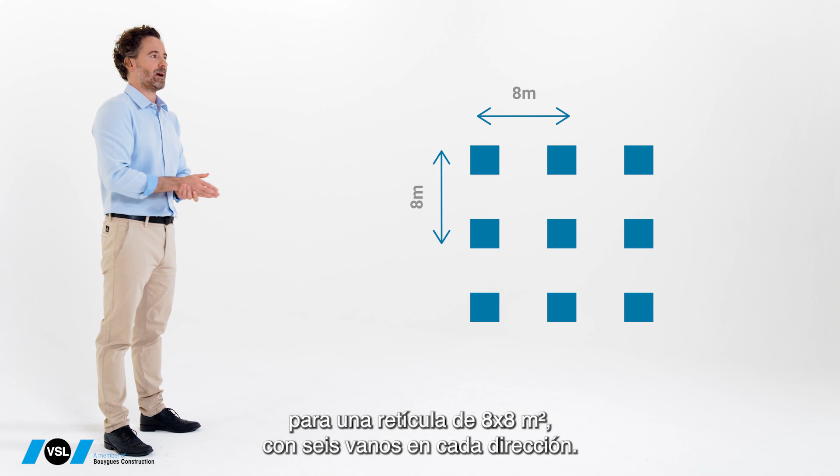Now, let's have a look at the global warming potential of the different components of each solution and their overall consolidation. For this study, we've got 5 slab configurations, all with typical loads for offices. On the one hand, we have analyzed 2-way configurations for an 8x8 square meter grid with 6 spans in each direction. Both a solid flat reinforced and a solid flat post-tension slab have been considered.

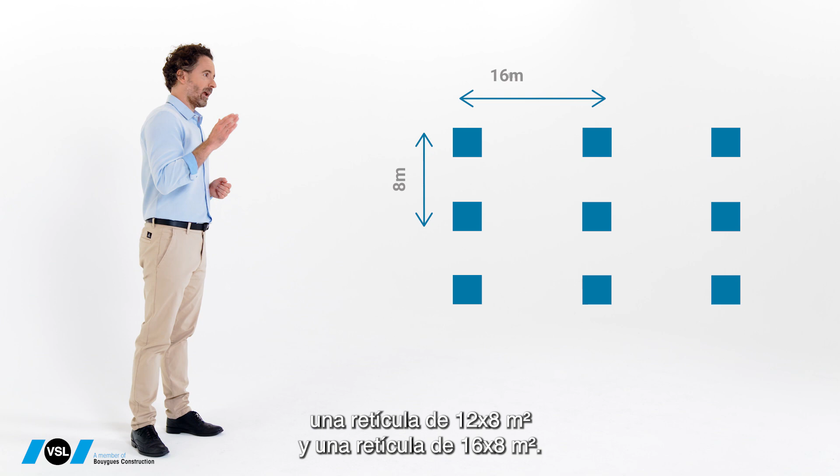Same for a 10x10 square meter grid and for a 12x12 square meter grid. For this third case, we've also analyzed an internally voided slab solution. On the other hand, we've analyzed 1-way configurations where the main span in one direction is larger than the span in the second direction. A 12x8 square meter grid and a 16x8 square meter grid. Yet, for this last type of grid, we consider that to be outside the range of reinforced concrete solutions.

At this point, it might be relevant to share a few details about how we compared. To be fully objective and to simplify this comparison, PT components other than strands have not been considered. This means ducts, anchorages, and grout. This could multiply the PT part by around 1.3. In real life, things can vary according to projects or countries. But once again, for the sake of objectivity, let's consider that we use the same concrete for all options.

The quantity of materials, PT and rebar, mainly depends on the local standards and codes. For this study, we've used the Eurocode, which so far doesn't allow for green concrete for PT slabs. According to the Eurocode, it is common to use concrete with a high percentage of clinker, cement type CEM1, that has a higher carbon footprint. For reinforced slabs, we can use green concrete, which can be less carbon emitting. Here, for the comparison exercise, all concretes are type CEM1.

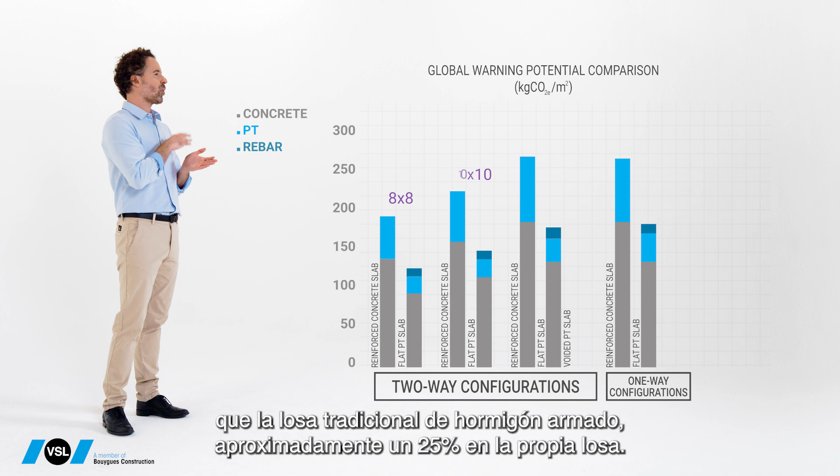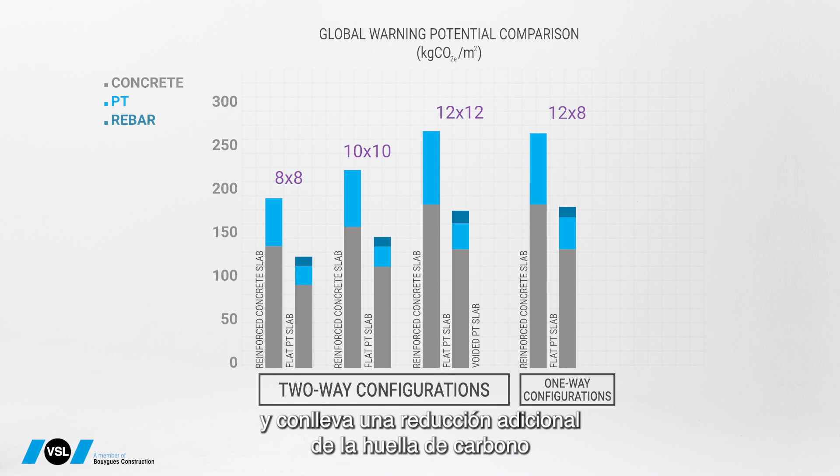So what can we notice? First observation. The post-tension concrete slab option is less carbon emitting than the traditional reinforced concrete slab by about 25% in the slab itself. This self-weight reduction allows for an optimization of foundations, columns and walls and brings an extra reduction in carbon footprint, yet not considered in this analysis. It might be done with other codes than the Eurocode, but in any case there's always a gain. In a nutshell, PT slab is definitely a sustainable solution compared to traditional reinforced slab.

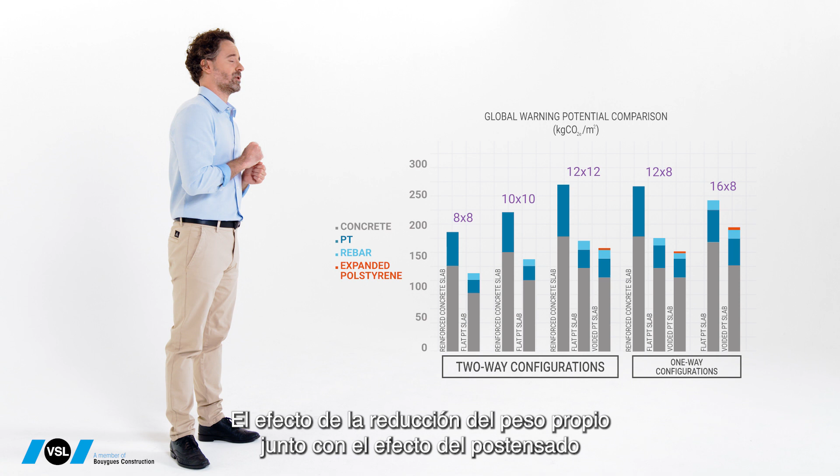Second observation. PT voided slabs, that can also be PT waffle slabs or ribbed slabs, allow for additional savings in carbon footprint. The effect of self-weight reduction combined with the effect of post-tensioning provide very efficient solutions in terms of low CO2 emissions. In fact, the combination of voiding with post-tensioning is the most sustainable choice when we work with cast in situ slabs.

I've just realized I mentioned waffle and ribbed slabs alongside PT voided slabs. Maybe I should quickly explain the difference. With the waffle slab, the installation method is slightly different from the internally voided PT slab. Here, we place the voiding elements directly onto the falsework prior to assembling the steels and pouring the concrete.

The ribbed slabs, that exist in both reinforced concrete and PT concrete, are specifically used for the one-way slabs. The voids in the slabs are placed to create a ribbed one-way solution. This solution has larger benefits in the reduction of consumption of materials and in the reduction of carbon footprint.

That's it. Of course, the choice of a slab solution depends on many criteria, but the carbon footprint is an important indicator to explore and consider in your decisions.